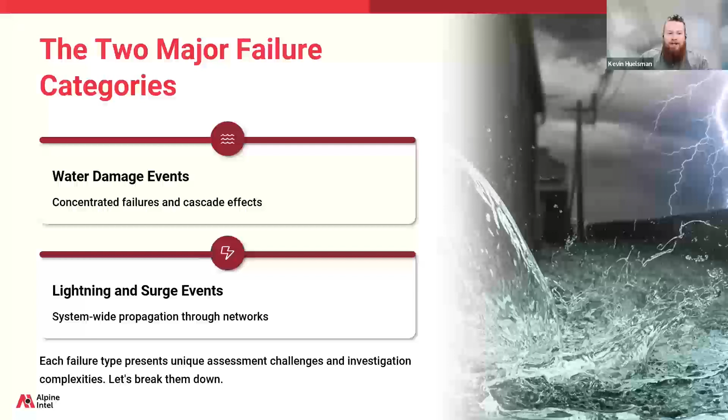Think of a burst pipe or a flooded basement affecting multiple connected systems. Second is lightning and surge events, and these may propagate system-wide throughout the electrical or network connections, affecting multiple points simultaneously rather than spreading out from one location. Now, each has its own assessment challenges. Water damage is about tracing that cascade, and lightning and surge is understanding that network propagation, how it spread out. So let's look at each category in detail.

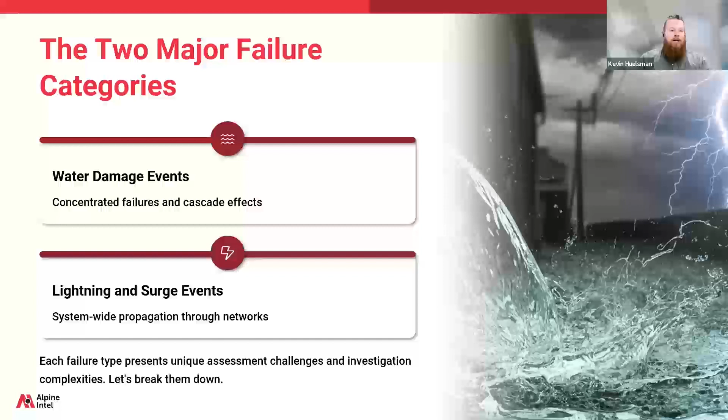Water damage to central equipment racks can create a domino effect. One incident can actually knock out lighting, heating and air conditioning, security, everything connected to that central rack system. And the key takeaway here is the brain. It's great because it's all in one place, but all in one place can be a critical vulnerability.

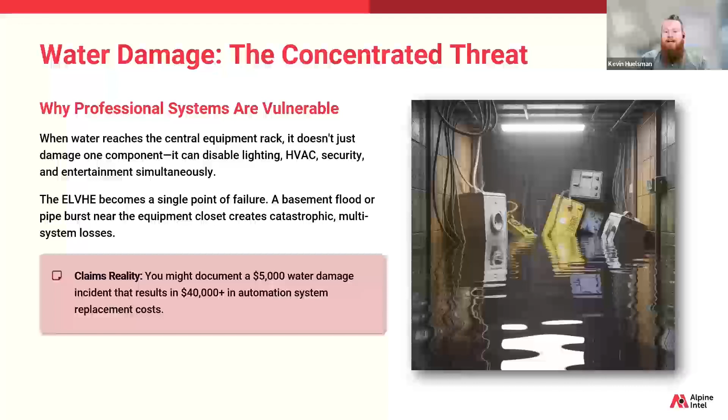A basement flood or a burst pipe near that equipment closet starts out as a local problem, but it can also lead to a total system failure. And this is where claim realities start to hit hard. A $5,000 simple water incident can balloon into 40 or more thousand dollars in automation damages. You'll see a little bit more about that in our claim scenarios.

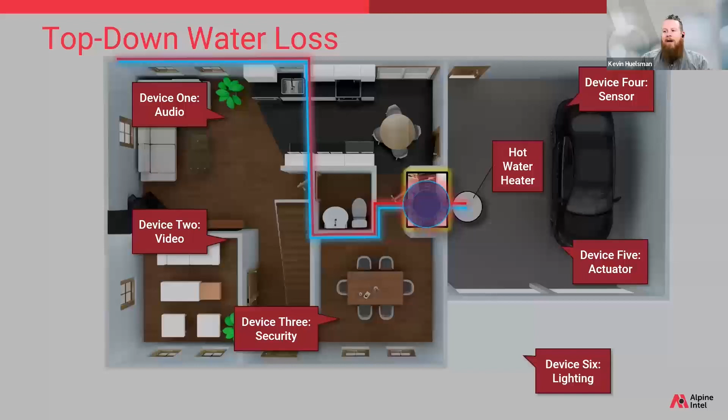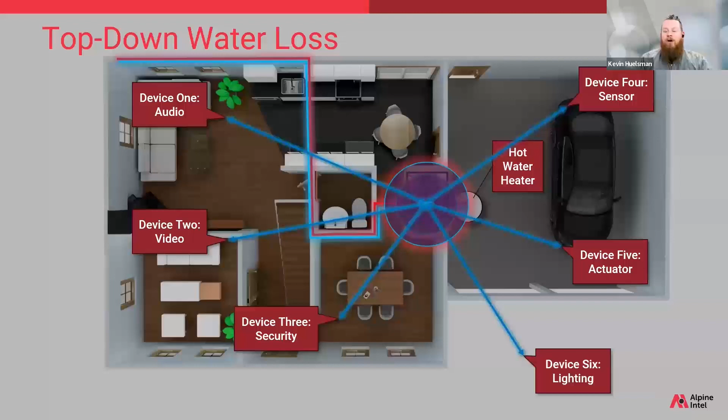This time we've got a water heater and plumbing routed rather precariously over this rack system. If we get a water break here, maybe a freeze failure or a bad install, over these data racks and equipment, that water's soaking into all this equipment. We're talking about maybe 10 to 20 gallons per minute from a water supply line rushing into this space. And remember, our professional system, all of these devices are connected, routed back to here. So the brain is affected, so too is the rest of the system as it goes offline.

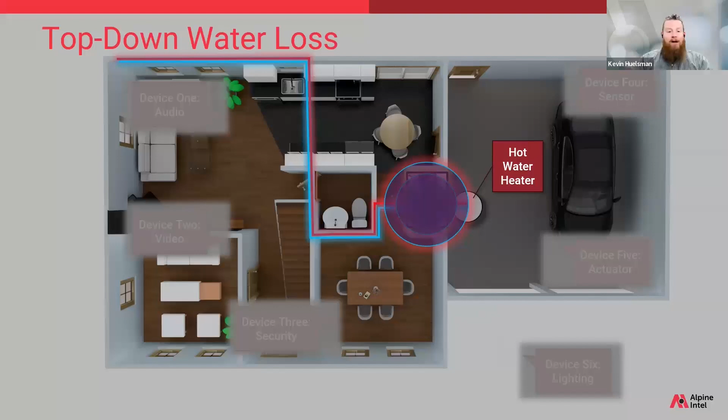This is where DIY systems might have a slight advantage. They perform just like the first scenario, so only devices that were directly in contact with the water damage would potentially be affected. That is unless the router is sitting in that closet, and then nothing for either system is going to be potentially working.

Now, the positive side for possible water claims: both DIY and pro systems may have automatic mitigation systems configured in, and this can be a real game changer for water damage prevention. They do make smart shutoff integrations available on the market. These professional installed systems detect leaks and automatically shut off water flow immediately. It's like having a 24/7 watchdog on your plumbing system. You might even see discounts offered to customers who have these installed.

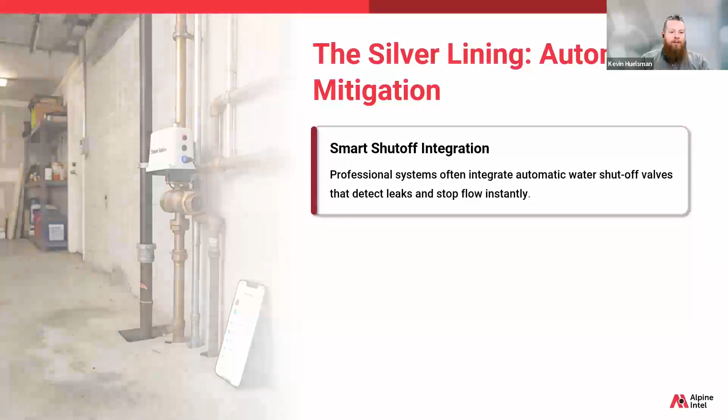Now, taking the big dollar home automation systems out of the equation for a moment, there is proven savings here. The numbers speak for themselves. These systems reduce the average water claim by an average of about $4,000, and this significantly limits the damage here.

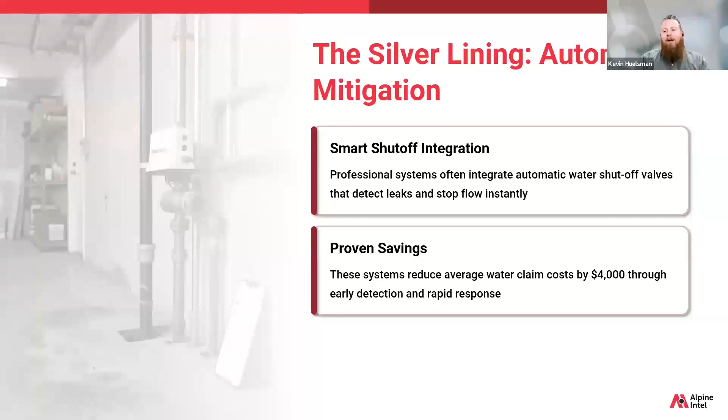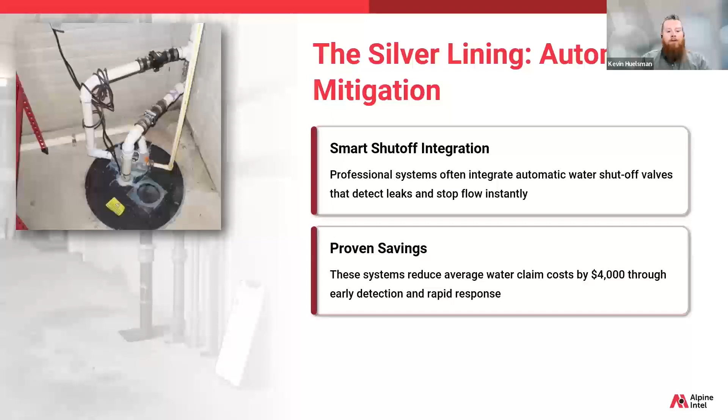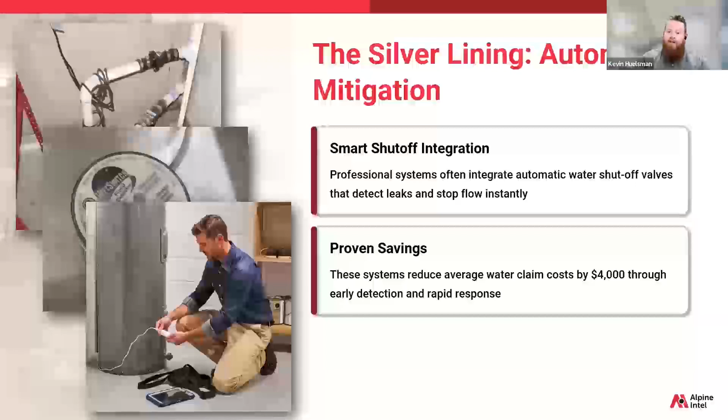Again, discounts might get offered because of these devices, but it's not just shutoffs. It could be simple things like sump pump systems with backups and push notifications and alarms, or pan sensors for your ACs in your attic spaces, or water heaters and laundry pans, or it might just be general moisture sensors around other appliances, or general areas where you might want advance notice of water someplace where it's not supposed to be.

So what do you do when you get a water claim and your insureds are asking you for help? Here's some quick advice that you might want to give them, and this might actually help minimize the damages overall for you as well. The first priority here is going to be to de-energize the system immediately. This is going to help prevent possible short circuits or burnt up components and carbon tracking.

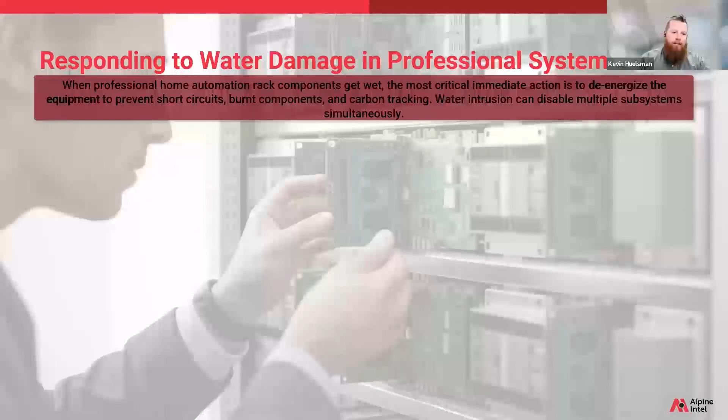Water intrusion can knock out multiple subsystems all at once, so it becomes really important in the insurance process. You want to get these big three steps in place. The first is going to be controlled drying and then inspection. So don't rush to power these devices back on. Thorough, methodical drying is essential, followed up by detailed inspections before you turn the power back on.

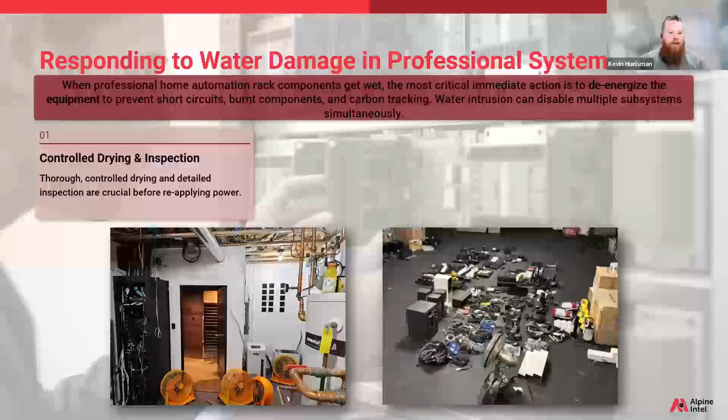Now, once you get there, we're talking about bench or metered testing of individual components. Professionals can test individual module cards, processors, switches, and assess whether those are functional or whether they are actually damaged.

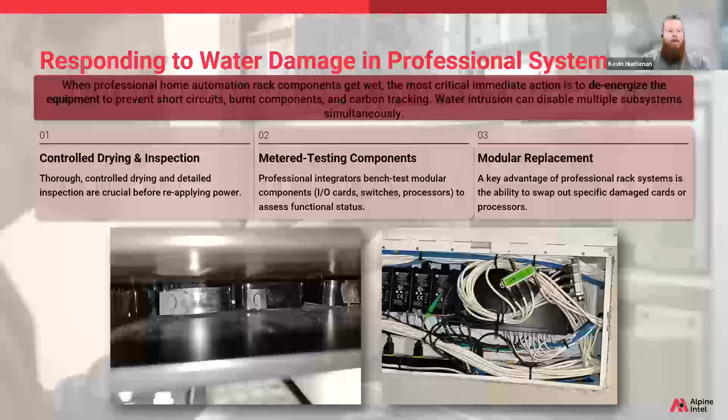Modular replacement. This is where professional rack systems shine. You can actually swap out specific damaged cards or processors or individual rack components, and generally there's no need to replace the entire system.